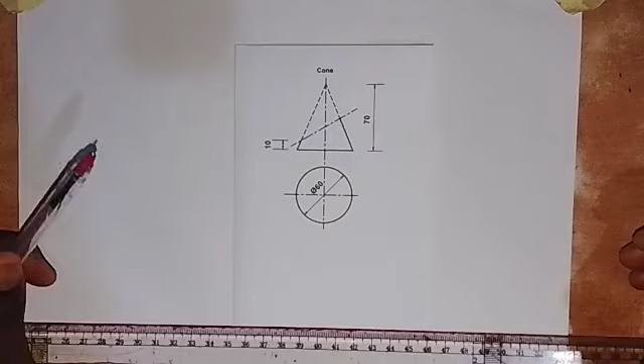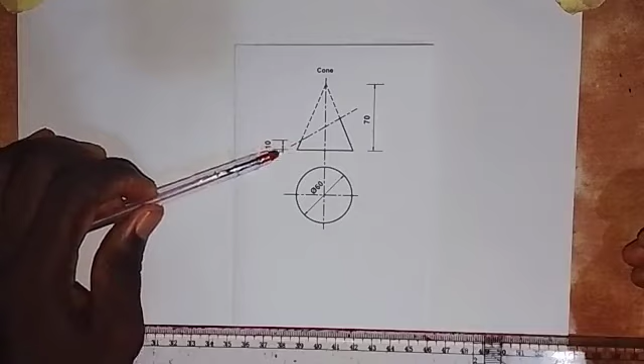Here we have a cone cut by a cutting plane. The diameter of the circular base of the cone is 60 millimeters, the height is 70 millimeters, and the point where the cutting plane touches this side is 10 millimeters from the base. The cutting plane is assumed to be at an angle of 30 degrees to the horizontal.

Let's see how we can produce the complete plan, the true shape, and the end elevation of this truncated cone. First we have to draw a vertical center line, so I'm going to draw it here like this.

Then we come up and draw a horizontal center line going in this direction.

We are going to divide the diameter by 2, giving a radius of 30 millimeters. So we take a measurement of 30 millimeters on the ruler with the compass.

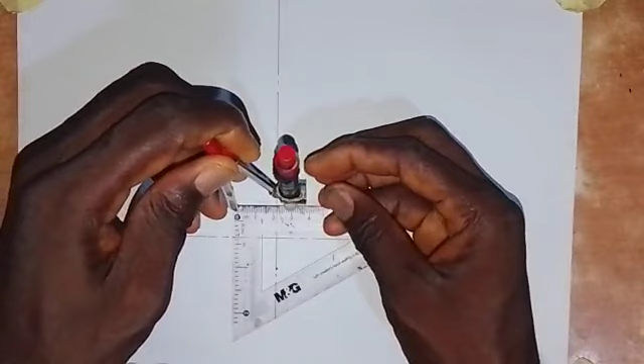I will put the pin of the compass at the point where the two lines intersect, and draw a circle. So here we have this circle drawn, which will be the circular base of the cone.

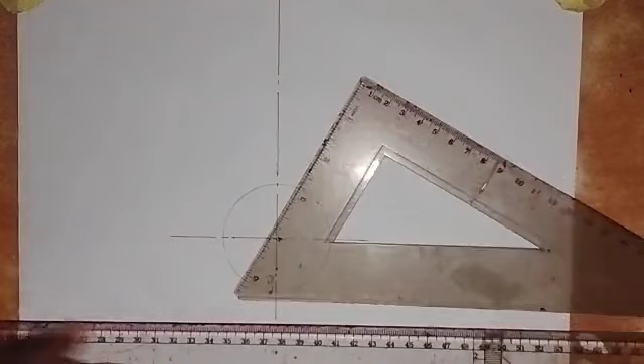Then I'm going to divide this circle into 12 equal parts using the set square. We draw a line, then come to this side and also draw a line from this point through the center. Then we turn the set square and draw another line through the center, and slide to this side to draw another line through the center of the circle.

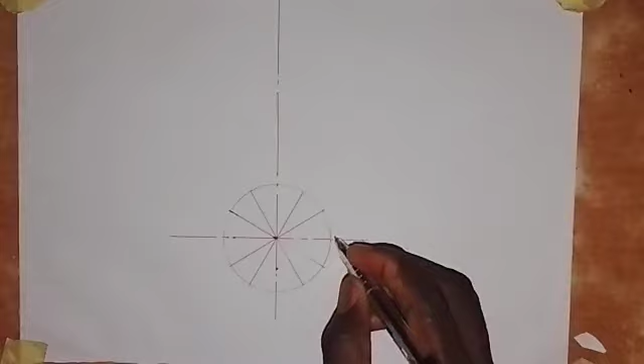So I'm going to number the points on the circle: this point is 0, then 1, 2, 3, 4, 5, 6, 7, 8, 9, 10, and 11.

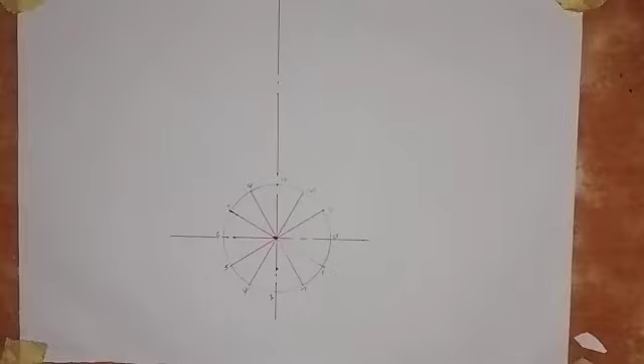Having done that, the next thing we do is draw the front elevation. So come up a bit and draw a horizontal line. Then from point 0 here, we draw a vertical line to touch the horizontal line.

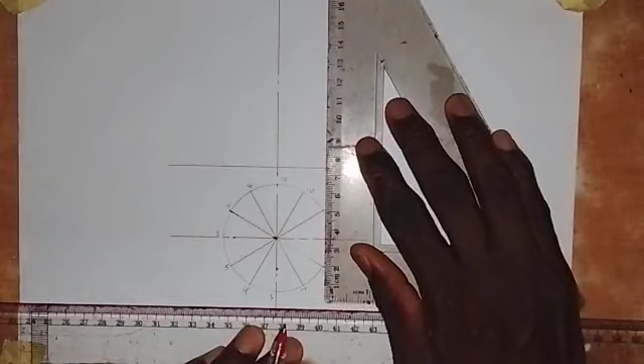Now come to point 1 and 11, and draw a vertical line to touch the horizontal line. Then come to the point for 2 and 10, and draw a vertical line touching the horizontal line. We have also done that for 3 and 9 as the center line.

So we come to the point for 4 and 8, and draw a vertical line from here to touch the horizontal line. Then come to the point for 5 and 7, draw a vertical line touching the horizontal line. And come here for 6, and draw a vertical line touching the horizontal line.

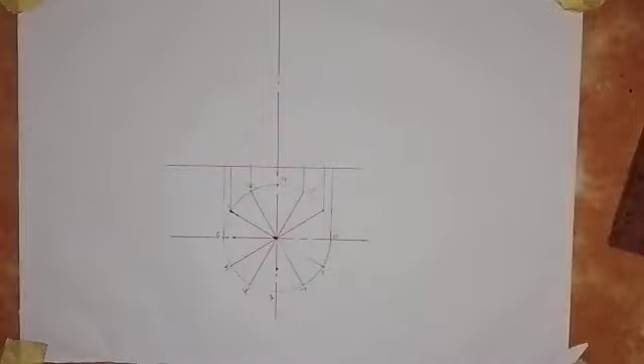Now, having done that, the next thing we do is take the distance of the height of the cone, which is 70 millimeters here. That is the apex of the cone.

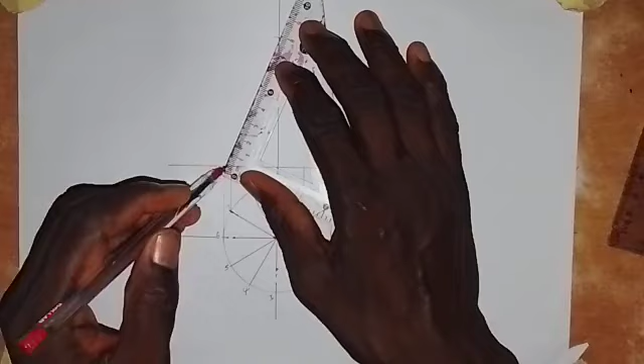Now we connect these points together with the apex. So we join this point to the apex, and draw from here to connect the apex with the point here, and do the same for the others, drawing lines from each point to the apex.

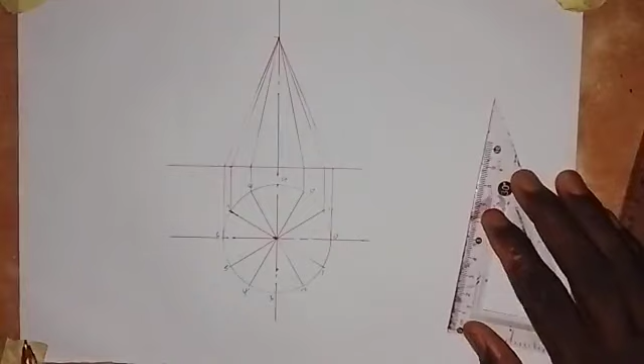Having done that, let's draw the cutting plane. So take a measurement of 10 millimeters up from the center. Then trace it here on this side, coming to this point, and we mark this point.

Then we are going to draw the cutting plane. So with a 30 degree set square, we draw the cutting plane through this point, like this.

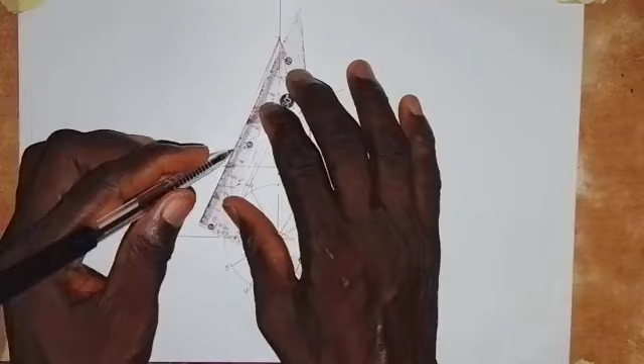All right, so this is the cutting plane, so this part is cut off. What we need to do now is make this line a thick line from here to here, and this line a thick line from here to here, and this baseline, we make it a thick line. So all other lines are thin continuous lines, as you can see here.

Now let's draw the complete plan. So this is line 0. The cutting plane touches line 0 at this point, touches 1 and 11 at this point, touches 2 and 10 at this point, and touches 3 and 9 at this point. It touches 4 and 8 at this point, 5 and 7 at this point, and 6 here.

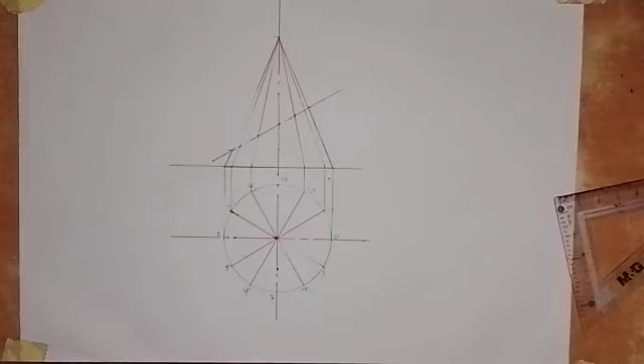So what we have to do is project a vertical line from each point down into the plan to intersect these lines that we have here. Let's look at 0 first. If I draw a vertical line from here, it comes down like this and intersects line 0 at this point, so we take note of that.

And that of 1 and 11: draw a vertical line from this point here to intersect 1 and 11 - intersect 1 at this point, intersect 11 at this point. Then the one of 2 and 10: come here, draw a vertical line like this. So here we have 2 and 10.

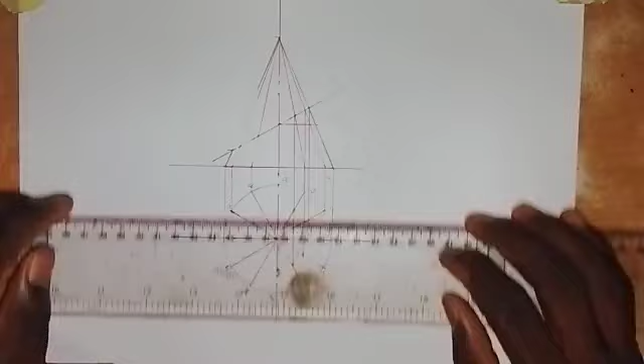Then for 3 and 9, this line is a vertical line, unlike these ones that are slanting. So for us to get points 3 and 9, we have to come to the center here, and draw a horizontal line to this side. Then we take the compass and take that measurement, from here to this point, take this distance like this. Bring it to the center, and make an arc here for 9, and an arc here for 3. So we have this now.

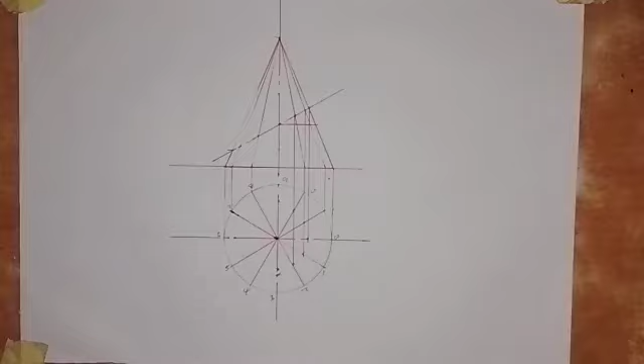All right, so this is point 3, and this is point 9. Let's take note of that. Next is 4 and 8. All you have to do is come to this point with the set square and draw a vertical line down like this. So it touches 4 at this point - this is point 4, and this is point 8.

So next is 5 and 7. You come to this point here and draw a line - it touches 5 at this point. This is 5, and this is 7 here. Lastly, that of 6: we draw a vertical line from this point 6 to touch this line 6 here. So here we have point 6. Let's take note of the point - so we have this.

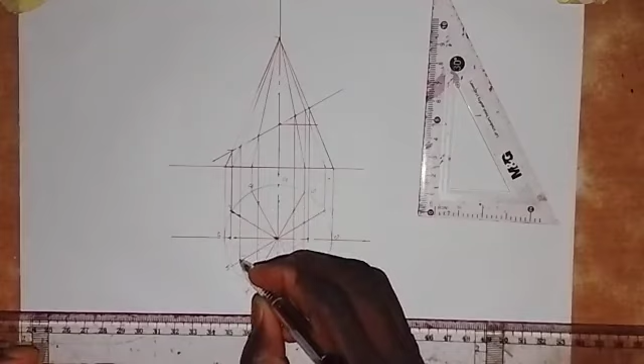So all we have to do now is join these points together with the use of a French curve. So I have my French curve here - starting from here, I should be able to join these 3 points together. So I join these 3 points together like this. So we have this now. Then I can also join these 2 points together like this - so we have this one now.

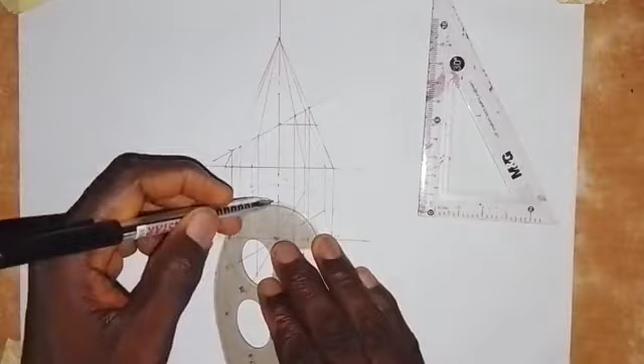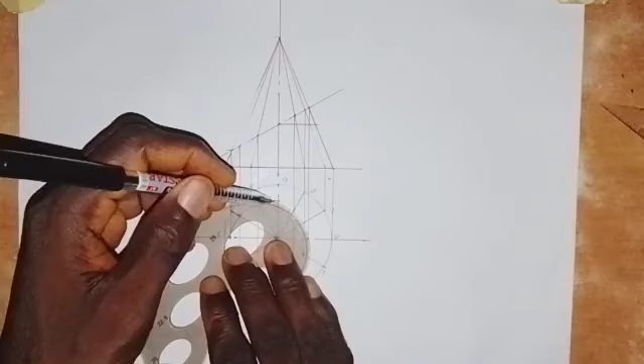Okay, so then continuing - I can join this point together like this. So joining this point together, it goes like this. Okay, so then we're still going.

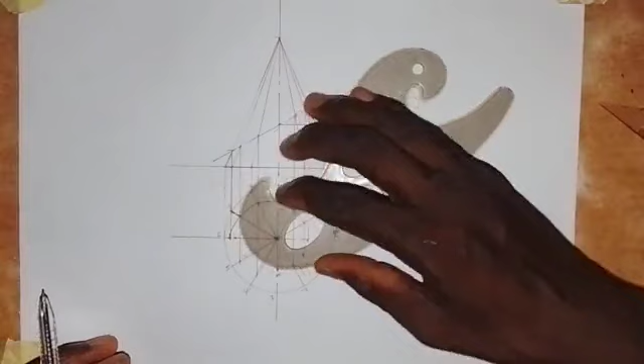So let me come to this side - I can join these 3 points together like this. So we have this. Okay, then I can join these points together. So here we join this point together like this.

Okay, so then we also have this point being joined together. So we join this together like this. Okay, so we have this, and then we also join this point together.

So here we have this. All right, so then we are going to hash this surface. Why are we doing that? Because by the time this is taken off, we are going to see a rough surface here. So we need to make sure we hash this surface, so that roughness has to be shown in the plan.

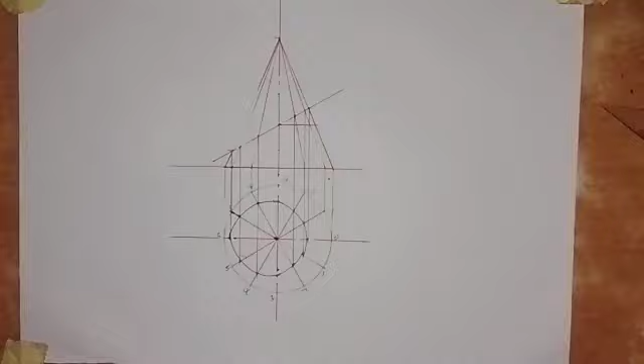With the 45 degrees square, we can hash this surface. So this is my 45 degrees square. Let's hash the surface. So we draw this line, and then we draw this line. Section lines are drawn with thin continuous line, and they are equally spaced and mostly drawn with 45 degrees square, as I'm doing it here. Okay, so we go on.

All right, so we are moving on. So we have this, and then so we have this, so we have hashed the surface. So here is the complete plan, as we are asked to do that.

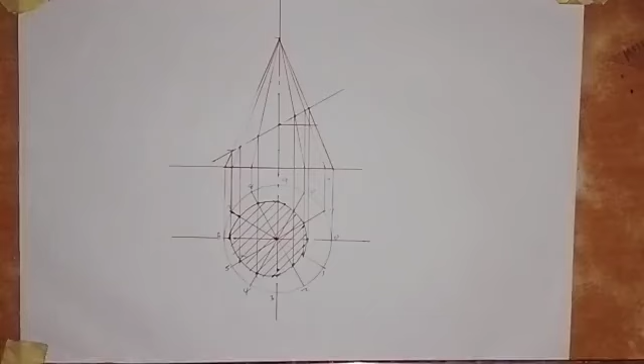So next is for us to draw the true shape. To draw the true shape, we are going to draw a line at this point, at this point, and this point, this point, this point, this point, and this point, and each of the lines will be at right angle to this cutting plane.

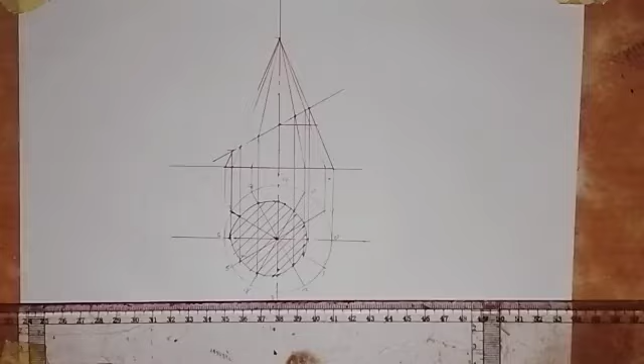Since we have drawn the cutting plane with the 30 degrees set square, the cutting plane is at angle 30 degrees to the horizontal, so we are going to use the 60 degree side of the set square to draw the line. So I'll come to this point here and I will draw a line.

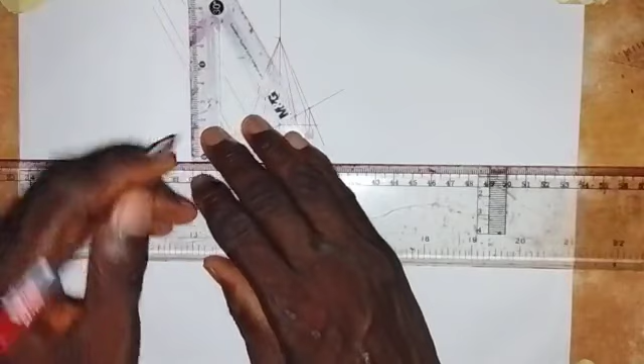So I will draw a line in this direction, so it goes up like this. Coming to this point, I will also draw a line in this direction. I will come to this point and also draw a line in this direction. I will come to this point, so draw a line in this direction. So here I will come to this point, and then I will draw a line in this direction. So come to this point, draw a line in this direction, and then lastly I'll come here and draw a line in this direction.

Then I will move away from the front elevation a little bit, like this, and I will draw this line. So on this line, here is line 0, so this point here is point 0, let's take note, and this point is point 6 here, as we have 6 here. Okay, so now we need to locate other points.

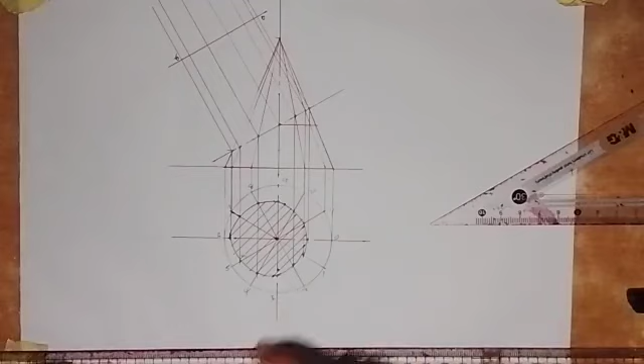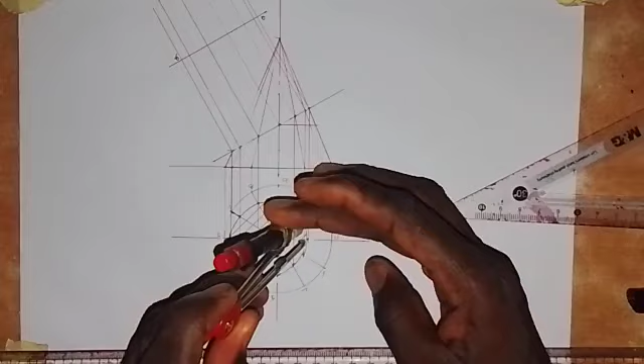To do that, that's very simple. So let me start with 1 and 11. This line is the midpoint of 1 and 11. If I put the pin of my compass here at this midpoint and extend to 11, or I extend to 1, any one that I like, taking this distance, this radius, I'll follow line 1. This is line 1 here. After 0, we have this line 1.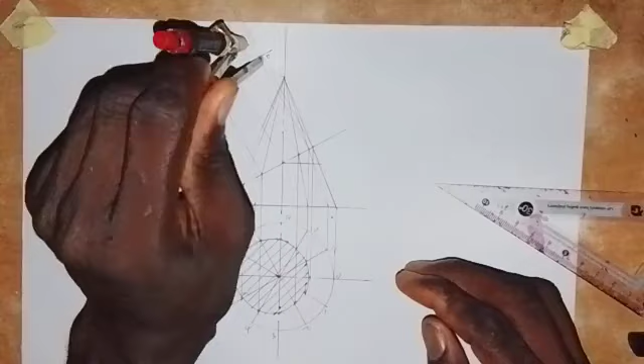So what I just need to do now is put the pin here at this point and make an arc here on this side for 11, and on this side I have this to be 1. So I can write it here now that this is point 1, and this is point 11. Okay, then let's take the next one.

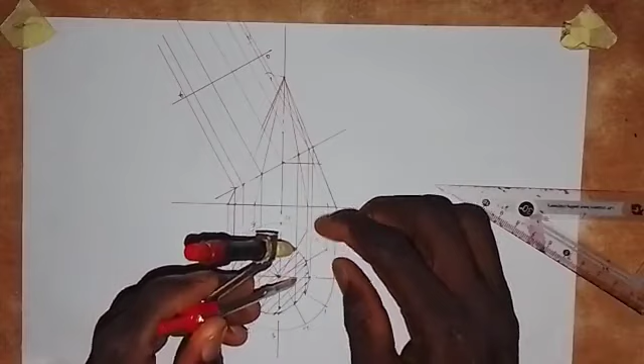This is the midpoint of 2 and 10. So put the pin here at the midpoint, extend to 2 or extend to 10, any of the two. So this line here is for 2 and 10. Bring the pin of the compass here, make an arc for 2 and make an arc for 10. So here is 2, this is point 2 and this is point 10.

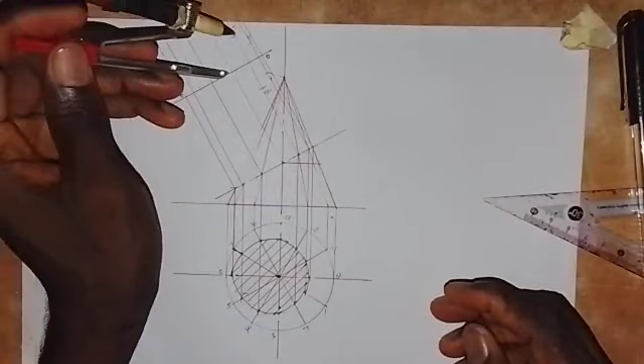So that of 3 and 9. Put at the middle here and then extend it to 9, or 3. So follow this line, this is for 3 and 9. Put the pin here, make an arc here and then make an arc here. So this is point 3, and this is point 9 here.

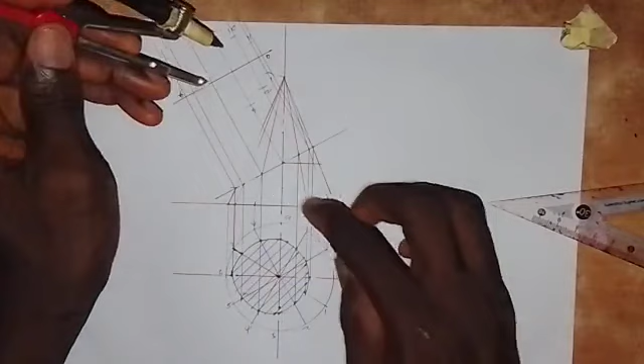So then for 4, 8. Put at the middle point here and then extend to 8, or extend to 4, any of the two, the distance is equal. Take this distance, so this is line 4 and 8. Come to this point, make an arc here and then make an arc here like this.

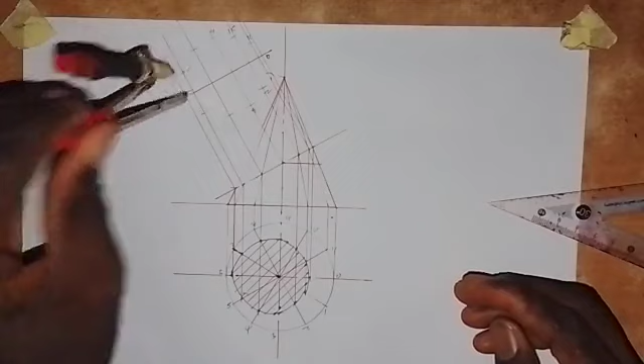Then next is what is 5, 7. Put it in the middle of 5 and 7. So extend to point 7 or 5. So this line is for 5 and 7. Put the pinpoint here. So make an arc here and then you make an arc here. Okay. All right, so we make an arc here like this. All right, so we have this one. This is point 5 and this is point 7. So here is point 4. This is 8 here. Okay, so let's take note of that.

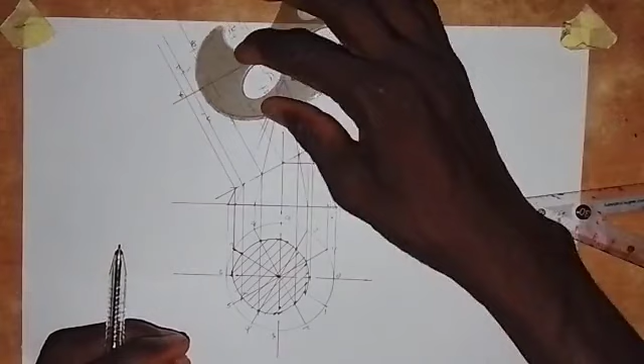So what we have to do now with the French curve, we join these points together. So I'm starting from here. Okay, so starting from here. So set it very well. Okay, so maybe I should join. So I can join these 3 points together, which goes like this. So we have this now. Okay, then I can go on.

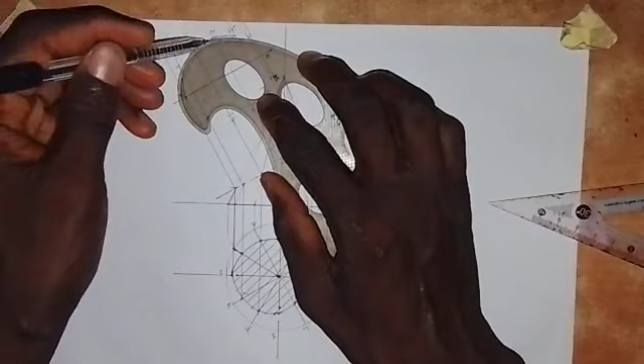So joining, I can join these 3 points together. So that goes like this. Okay, so we have this now. All right, so we have this. So I can turn to this side and join these 3 points together, which goes like this. All right, so then I can go on. So joining on this point. So this point is out. This one is out of it. So I can go like this.

So this is not supposed to be there. Okay, so I will go on. So setting the French curve like this, I can join these 3 points together, so it goes like this. Then these points, I will join them together like this. Okay, we have this, and then I can set the French curve like this. Okay, so joining these 3 points together, which goes like this. So we have this now.

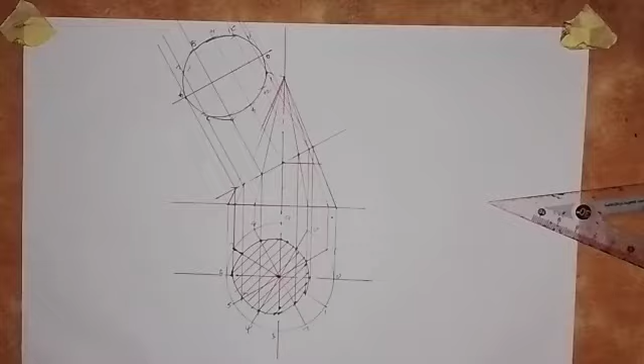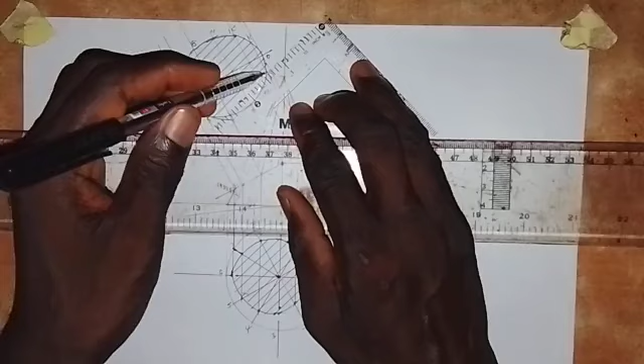Okay, so what we have to do now is to hatch this surface, and to do that we are going to make use of the 45 degrees set square to produce the hatching lines. So this is my 45 degrees set square. So coming to this point, I will draw the line like this. So we are producing hatching lines on this surface. Hatching lines are equally spaced, drawn with continuous line, and mostly with the use of 45 degrees set square, as you can see it here right now. Okay, so then we go on, draw this line, then we draw this line here. Don't forget the space, you should try as much as possible to make the space equal.

Okay, so here is the true shape of the cut surface. So I can write here that this is the true shape. Alright, so here we have the true shape here.

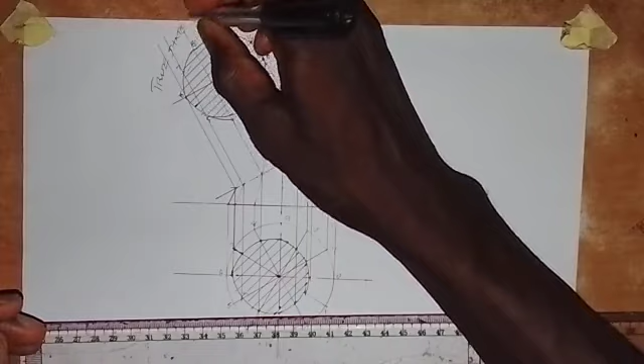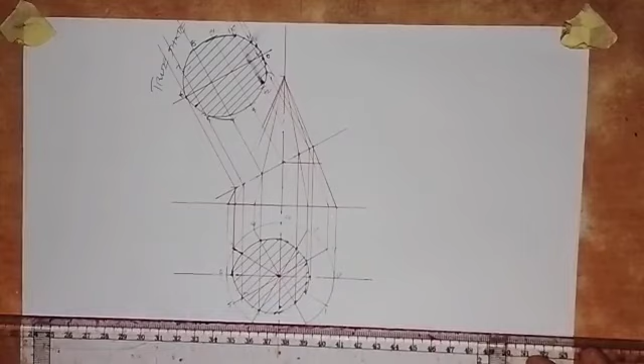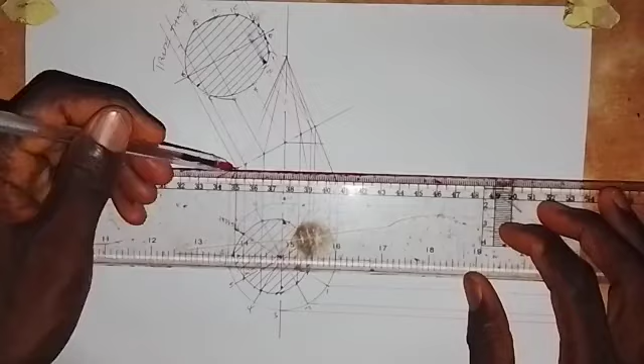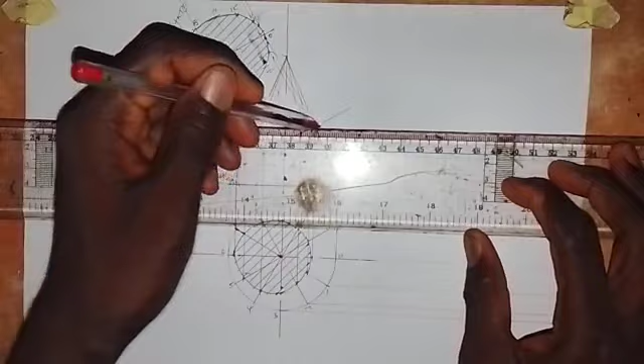This point is for 4, 8, so you draw a horizontal line to this side. This point is for 3 and 9, so draw a horizontal line to this side. This point is for 2, 10, so you draw a horizontal line here. And then this is for 1, 11, so draw a horizontal line. And this is for point 0, draw a horizontal line. For the apex of the cone, come up here and then draw a horizontal line in this direction.

Alright, so the next thing that we are going to do is draw. So let's start with the center. Okay, sorry. So before that, we need to make use of our 45 degrees set square to draw.

So we have to draw a line at 45 degrees. We take our 45 degrees set square, setting it at this point on the front elevation. At this point here, draw a line. This line is at an angle of 45 degrees to each of these lines. Then from this point, let's first of all work on the center. This is the center here.

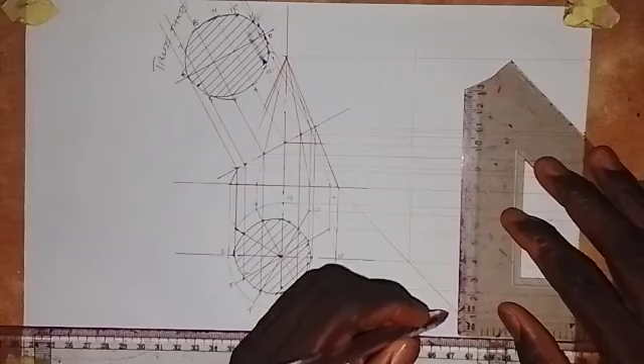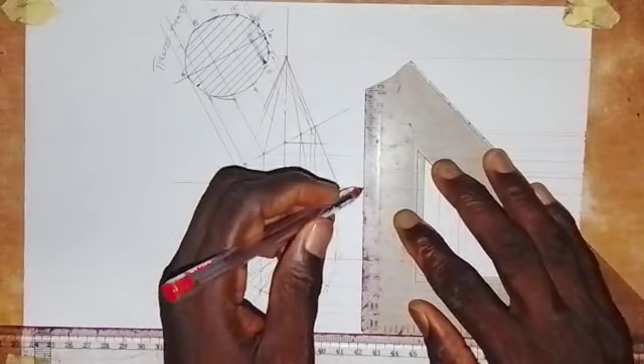What you need to do now is draw a vertical center line up like this, and let it touch this and all other ones. For this one, we just draw to touch the baseline, which is this line. Then we come to this point and draw a vertical line to touch the baseline. Here we come to this point, we draw a vertical line to touch the baseline. Then we draw a vertical line touching the baseline, and then we draw touching the baseline.

Now we are going to connect these points with the apex of the cone. We draw a vertical line, we draw a slant line like this from this point, and from this point draw a slant line, and from this point also draw a slant line to touch the apex. Come to this point, draw a slant line touching the apex, and to this point also draw a slant line touching the apex, and lastly we draw from here to touch the apex. So we have this now.

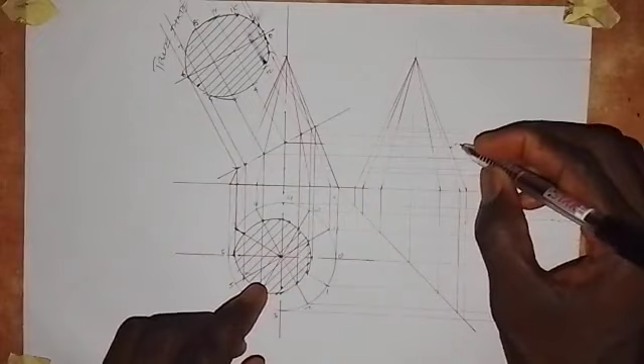Having done that, the next thing we are going to do is locate the points that we are going to join to form the cut surface here. So this is for 3. Where do I have 3? I have 3 on this center. So I go like this and then I come here. So 3 on this side with this vertical line, and then 3 at this center. So this is point 3. I have this point.

Next is 2, 4. Where do I have 2? Going up like this along this line. I have 2 along this line. So coming like this, this is point 2 here. But just look at what I'm going to do, because of time: this will be point 1, and this point is point 0.

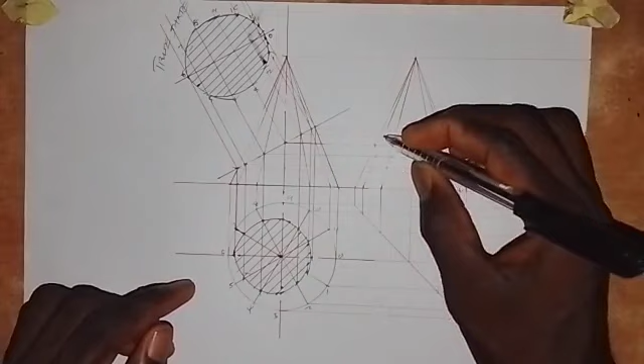Then if I go down like this, this will be point 4, this will be point 5, and this is point 6. This is point 7, this is point 8, this is point 9, and this is point 10. Here we have point 11. We need to join these points together using the French curve, so I will use my French curve. I'm going this way.

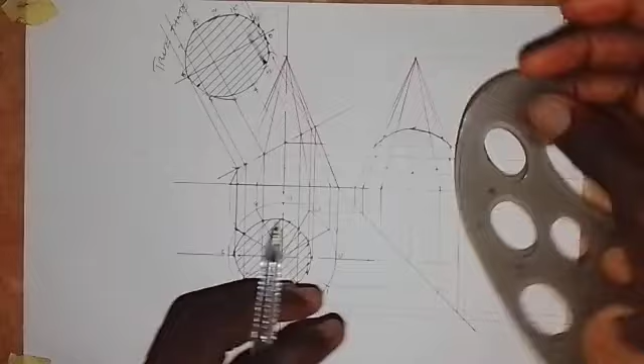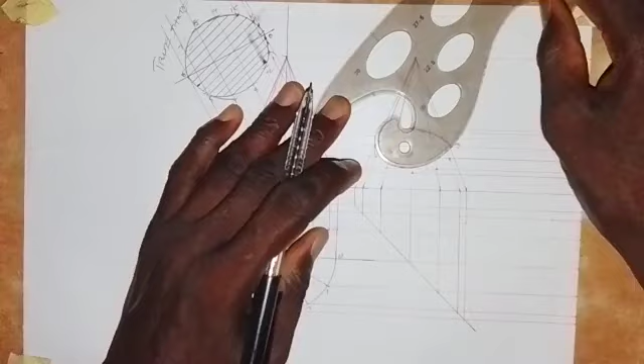All right, so I'll join these points together like this. Then, coming here, I will also join these points together like this. I'm trying to set the French curve. I can join these 3 points together, so it goes like this.

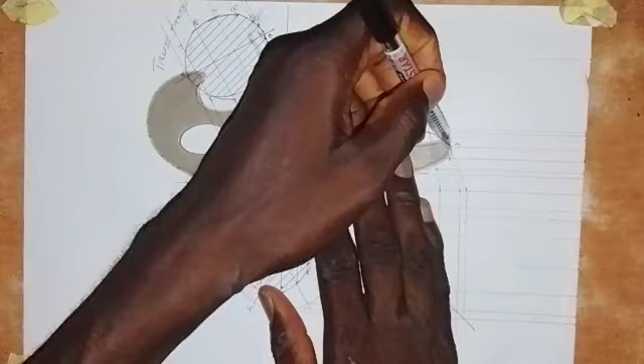Then coming here, I join these points together, and then set the French curve like this so I can join these points together. Okay, so we have this.

What we have to do now is make this line a thick line from here to here. We also make this a thick line from here to here, and then we make this line a thick line from here to this end. We are not done yet; we need to hatch this surface. With the 45 degrees set square, we produce hatching lines on this surface like this.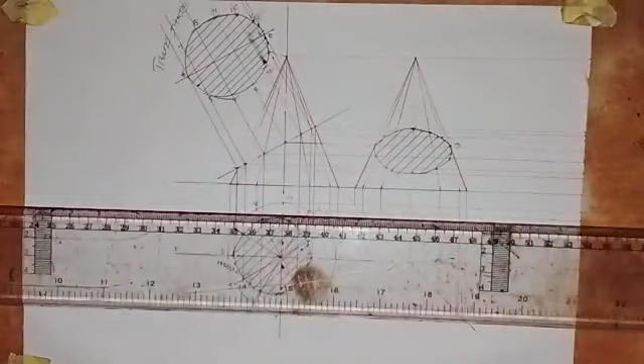So this is it. This is the end elevation; this is how it will look. You can see what I've done is very simple. All you have to do is practice. When you practice this, you become a master at this work.